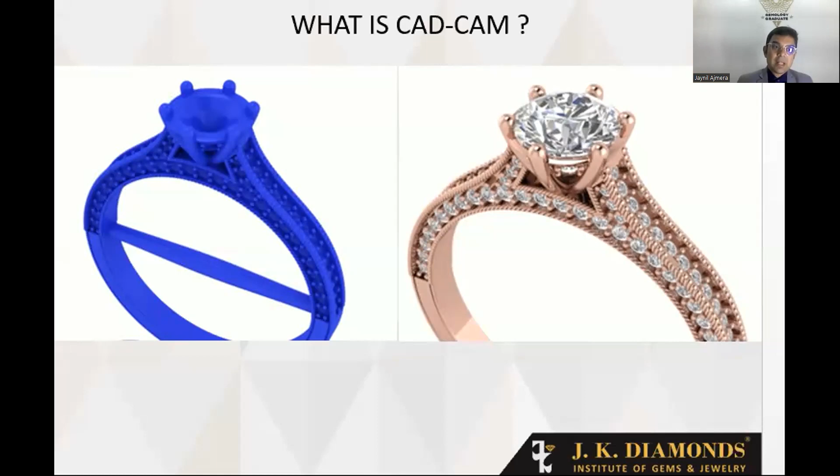So how is CAD benefiting us? What is CAD? Just a simple introduction, then we'll go for understanding more in detail. CAD is computer-aided designing, which is connected to CAM, which is computer-aided manufacturing. So CAD is a digital model of what artisans create by hand - the same model we create using CAD software. Using this software, you structure a piece of jewelry and then convert the file into STL format.

Then you actually get into the 3D printing mode, wherein there are two main types of 3D printers: additive, where it structures layer by layer, and subtractive, where it cuts through the jewelry. The additive is commonly used in our industry, whereas the subtractive is mainly used especially for CAD CAM jali work. I'm sure you've heard of these terms - laser cutting, CNC bangles.

So generally, we have separate software for subtractives also. We use ArtCAM, we can use Rhinoceros also, some people use Corel also. So we'll discuss about the software used for jewelry, for different types of jewelry.

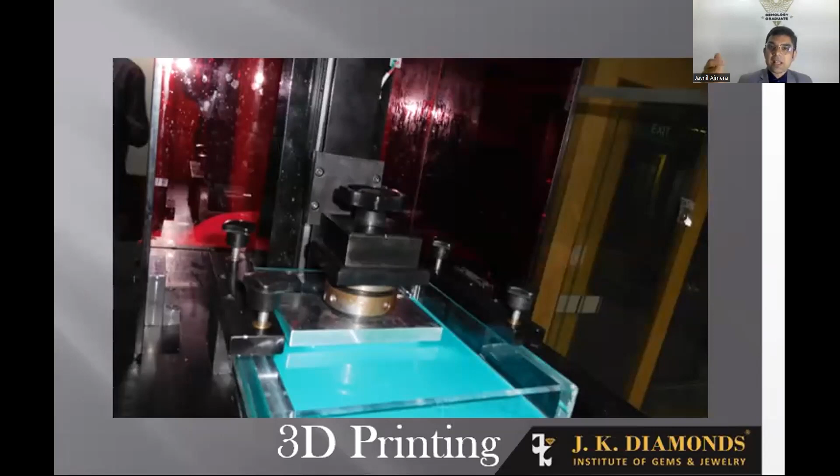Now, once you get the 3D print, also known as a CAM piece in the market, there are obviously different 3D printers available. And with these CAM pieces, if you want more quantity, we actually make a rubber mold or a die where you have this wax injector.

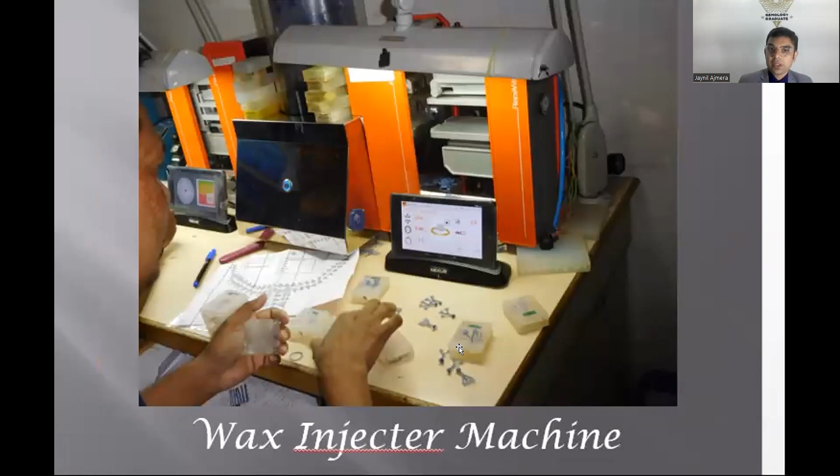Liquid wax penetrates into the hollow space, and we stick this liquid wax to the wax tree. This wax tree we put in a flask with investment powder so that the jewelry won't move, bend, or break. Then we put it in the casting machine and achieve a metal tree.

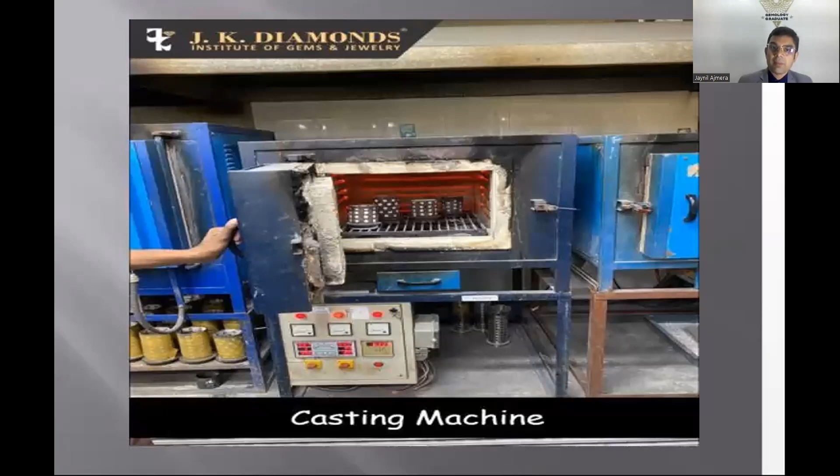This whole process has several steps, but I'm going through it quickly so we focus on the main part. This metal tree is actually the model that the karigar, who makes jewelry by hand, has created. So in one tree, there could be several pieces of jewelry.

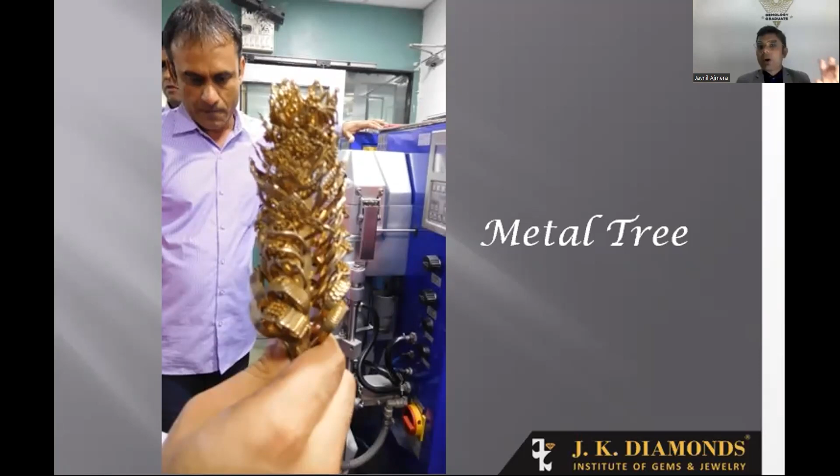So the point is, how does this address our business needs? How does it benefit us? This basic understanding of CAD to CAM to wax injector to casting is understood. Let's look at different models and different businesses and how they can benefit. Manufacturing segments have several departments and main points.

For example, in the modeling stage, the karigar will think of getting less metal wastage. Or in filing or soldering, in every setting, the diamond should not break. So all these stages have their own pain points. CAD CAM will really help you save the metal.

The karigars who charge making and wastage charges, they charge you 4%, 5%, 6%. It becomes very expensive, and eventually the customers have to bear it. So you can save on that.

You can save on making charges. Normally making charges that karigars charge are 600, 700, and still they don't deliver on time. They take a lot of time, and we also miss out on crucial dates.

Hence CAD will really help you save on time, because in one day you can actually make hundreds of jewelries.

Suppose you got a necklace as an order. A necklace literally takes 10 to 15 days to manufacture by hand, with a lot of making charges and wastage.

Whereas in a day you can make several necklaces through CAD CAM. So one strong advantage is you save your time, because every business counts on time. With that, you save on making charges, you save on metal, and the quality and precision are very high.

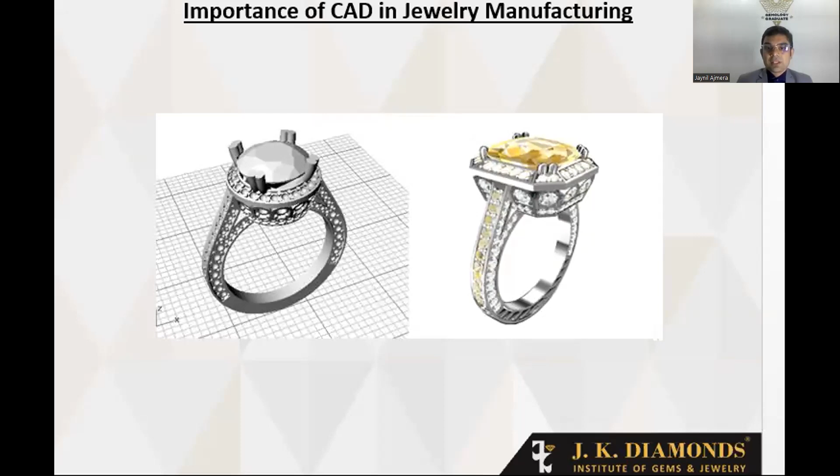For example, here you can select an area on this pendant metal. You can select the size of the diamonds and just place them, and within a few seconds you can actually set the stones.

So the traditional metal setting work is also being done by CAD. I'm just showing a basic comparison of what the karigar's work CAD is now doing. Stone setter's work is also being initiated through CAD.

Small diamonds and minute designs, CAD work is much more adequate, and the quality standard met is much higher. Hence exporters are using CAD majorly, and major cities have been using CAD.

Even complicated designs, we have made temple jewelry using CAD. We have made kundan and meenakari work using CAD. All types of jewelry can easily be manufactured.

So do you all agree? CAD is helping our manufacturing segment primarily, right from making charges, wastage, time. If we deliver on time, we get the payment on time. So the whole cycle, the finishing quality. Even there are many other departments now. Seeing the future of CAD, there are more and more advancements in tools, in machinery. We have seen now. I was very happy to see we have a specialized machinery show also in India, which we used to go abroad to see the machines.

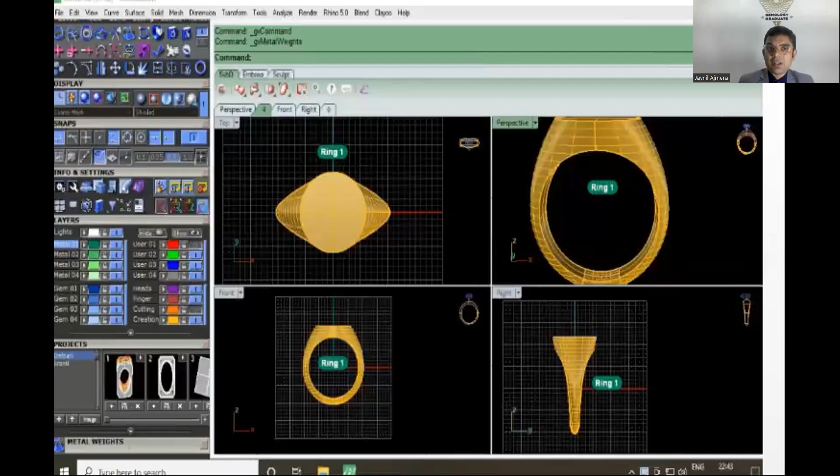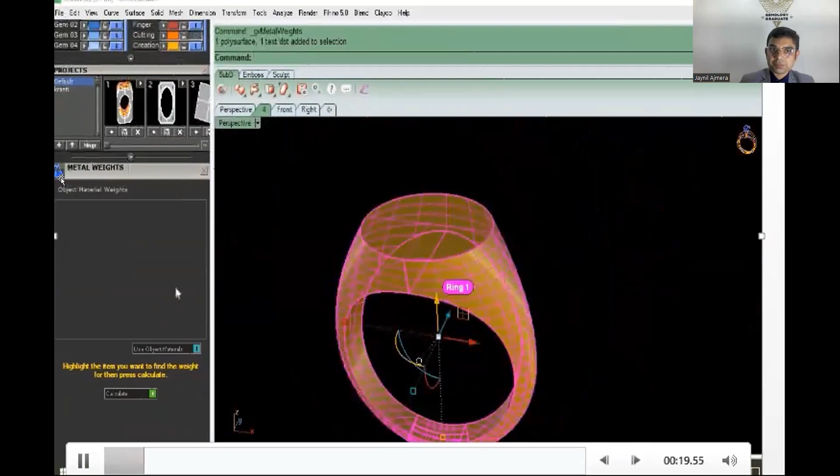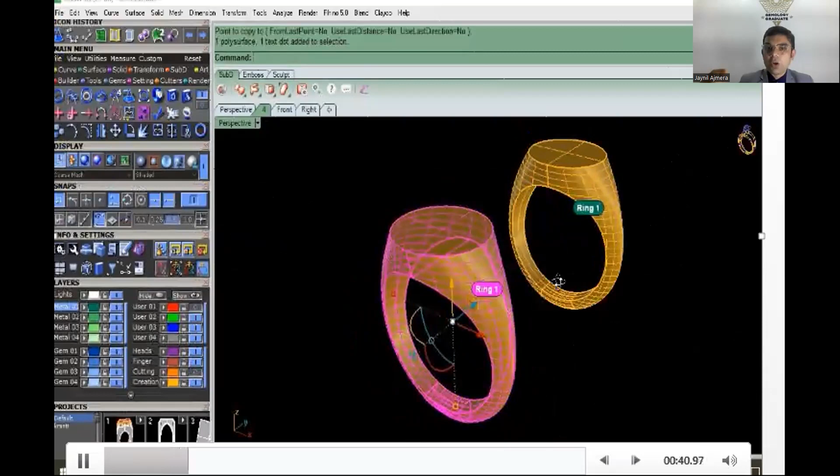How to fit into the customer's budget. So here we are showing you how a ring can be the lightest possible weight, and how to, there are these tools and commands, how to make it lightest possible weight by making it hollow, by scooping it. And this is how live we are sharing with you by comparing a ring one. So ring one, here you have the metal weight, which is almost 11 grams, which is too high for a ring. And as you know, the gold rates are increasing, and it's become challenging for even jewelers at what rate to keep charge, buy, sell. So almost a lot of trade has been at a standstill. So what you can do here is you can make it hollow, you can make it lightweight, you can fit into the customer's budget, you can do the needful requirement customization also.

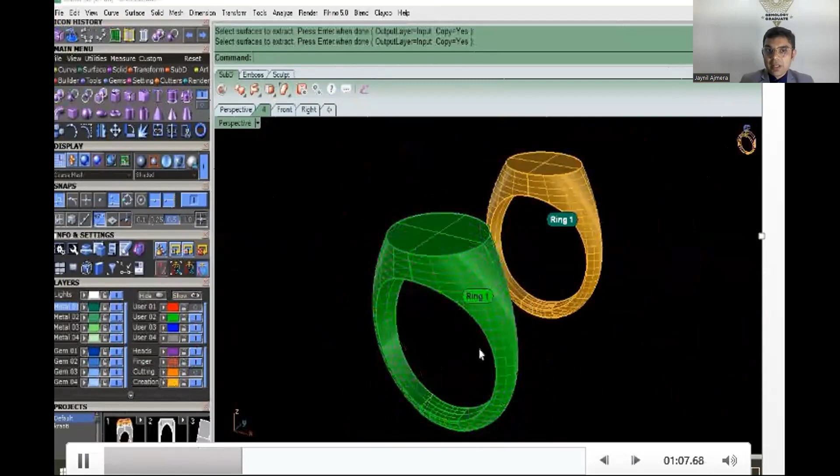Many a times, if you have your basic CAD designs ready, you can actually show the customer with different colors, different shapes, and they can actually select from the CAD design. So the customization also can be done. Fitting into customers' budget also can be done using CAD. So this is how live we are just sharing with you ring one and ring two, how we are comparing and making it lightest possible weight using the CAD feature. So the customer also is happy that you are understanding the needs and requirements and you're fulfilling that. So this is how we are doing it.

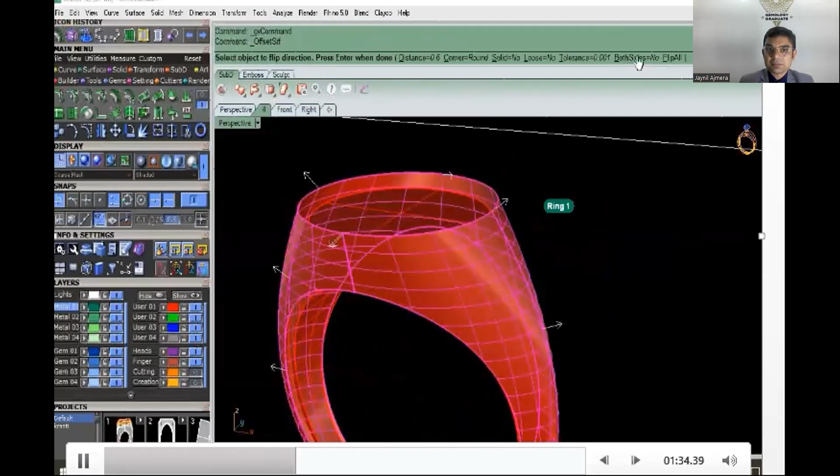Yes. So it'll take another 20 seconds. So you'll get how we have actually created the same design model, but the weight is much more lighter than the ring one.

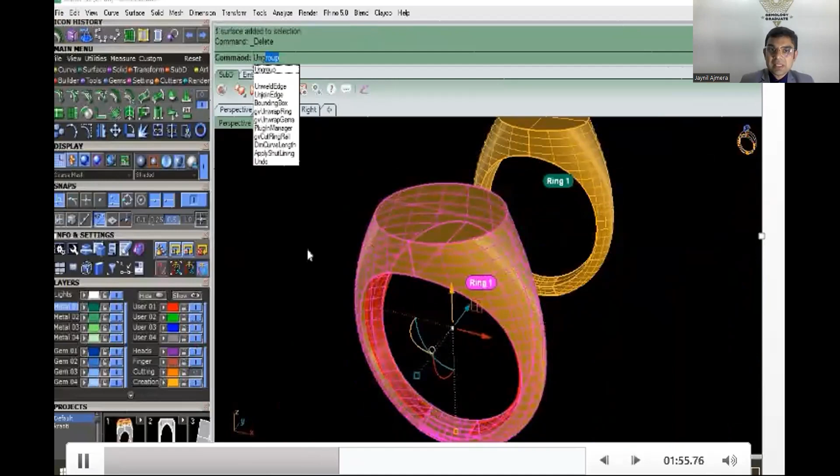So right now we have even a lot of openings which come. We have a lot of retailers asking for CAD designers who can render, who can animate, who can present. So that is also something which is really trending. I'll share that also with you.

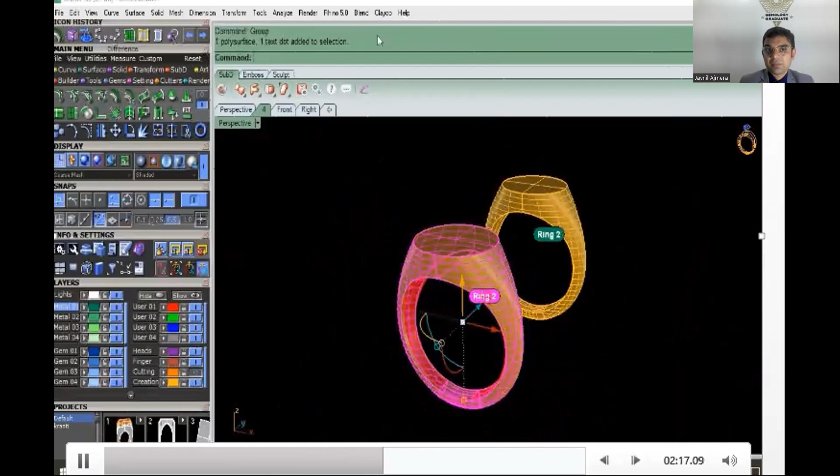So this part is removed actually. This part is removed.

Here we compare the metal weight. From 11 grams, we have reduced it to 5 grams, and we can still reduce it further. CAD will allow us to do that too.

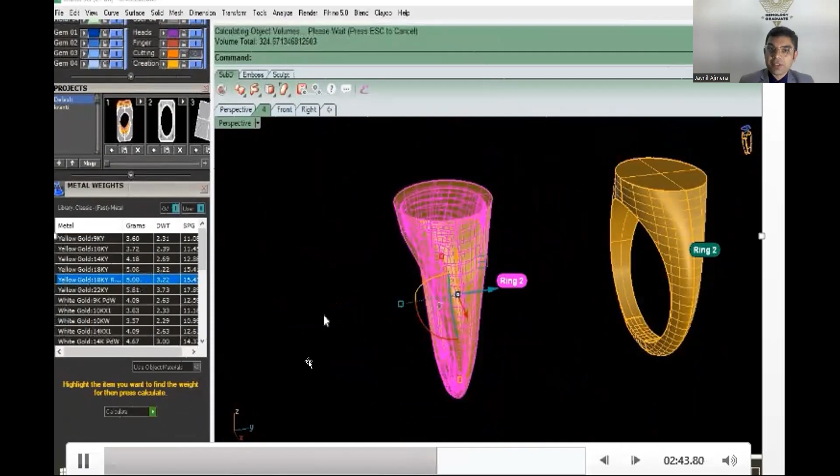Now moving to the next point, CAD also helps stop your designs getting copied. A lot of retailers are making CAD in-house and circulating it rather than sending it to the Karigar. They send it directly to 3D printers, or to those who can also provide casting services, mailing it to them directly.

Rather than showing it physically by wearing it, you can show it on e-commerce platforms, and that really helps customers understand interchangeable stones or 2-in-1, 3-in-1 jewelry designs.

As a businessman, we normally want to reduce manufacturing cost and time. With in-house CAD, we understand the needs and requirements of customers, and based on that we tell our CAD designers, or do it ourselves, or outsource it.